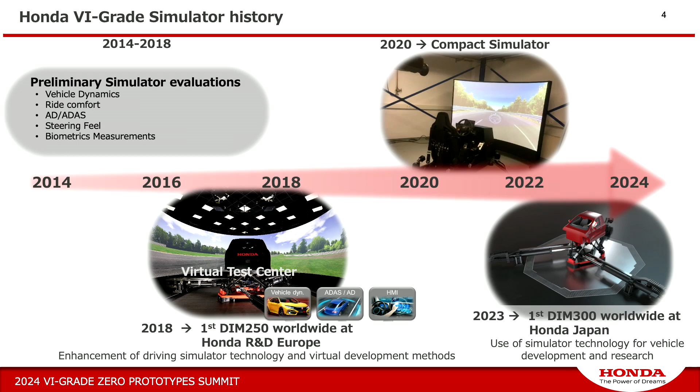Which spec changes can we really feel? We tested several simulator systems. We used them for ride comfort evaluations. ADAS is a big topic, steering feel, and we also gained quite good experience with biometric measurements. Based on all this experience, we decided in 2017 to set up our own virtual test center in our German R&D center, and we established the first DiM250 worldwide. Our role since then is to enhance driving simulator technology and to create new virtual development methods.

After setting up the virtual test center, we thought it's also nice to have a good preparation place because the simulator is very busy. So in 2020, we decided to set up a compact simulator. And based on all the experience we collected in the last years, our Japanese colleagues decided to set up the extended version of the DiM250, which is the first DiM300 worldwide, now used for vehicle development and research topics.

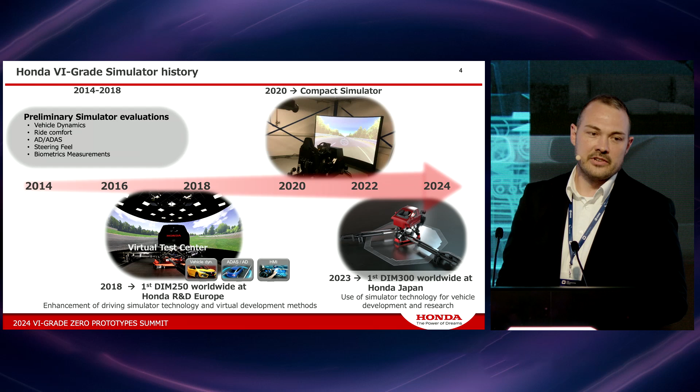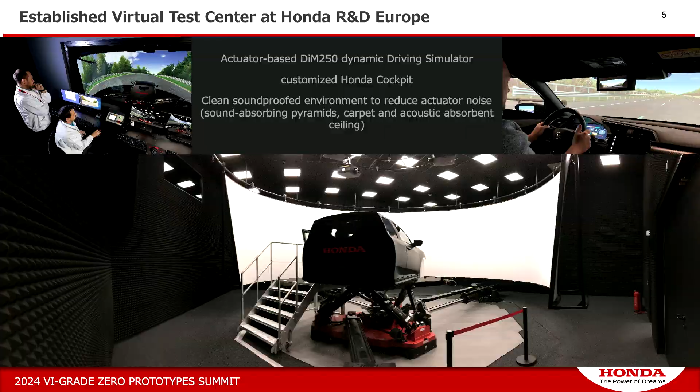On the next slide I would like to show you an overview of our DiM250 virtual test center in Germany. In the center you can see our simulator room, where our actuator-based DiM250 with our customized Honda Civic cockpit is located. It was very important for us to have a very clean environment because we not only do expert tests, we also do a lot of customer studies within our research projects. So it was important to have a clean, soundproofed environment that also reduces actuator noise. Therefore, we installed sound-absorbing pyramids.

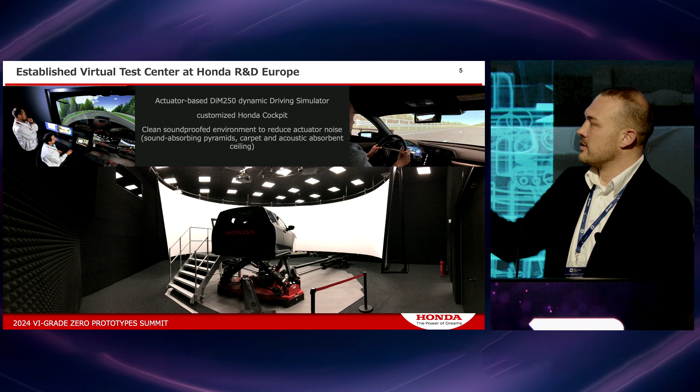We have carpet on the floor and acoustic-absorbent ceiling, so to generate really some kind of an, I would not say living room atmosphere, but it should not look like a test bench. And on the top left, you can see the control room, which is on the first floor, basically, so that we have a very good overview over the whole simulator room. And with this setup, we are quite happy since 2018.

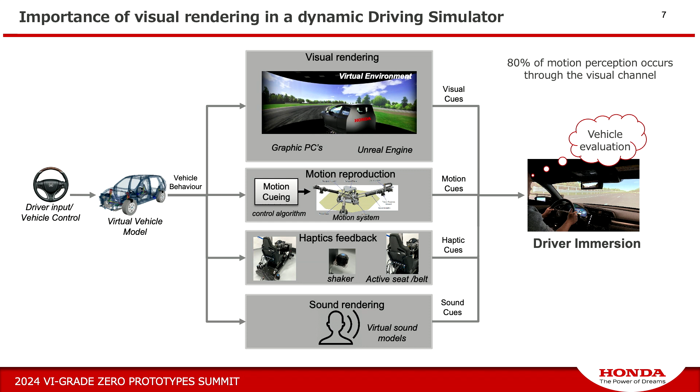Motion is one of the important aspects. To have a very good motion reproduction, we use our motion cueing algorithms, which then control the motion system and generate the motion cues. Haptics feedback, I think most of you already tested here the shaker setups and also could experience the active belt to get some haptics feedback and haptic cues. And also sound is a very important, essential part where we use our sound models, which generate the sound cues, to have basically full driver immersion, which enables us finally to have a very good vehicle evaluation capability.

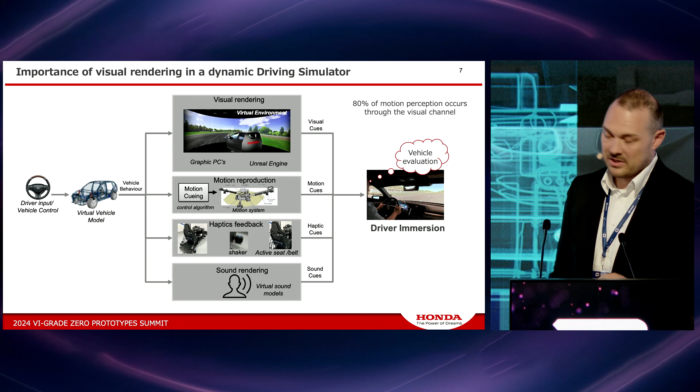And we already know from literature that the visual rendering, the visual flow, influences 80% of our motion perception. So it's a certain important channel which has a high influence on evaluation capabilities. Therefore, on our DiM250, we use 5 Barco projectors, the F70, where we have around 40 pixels per degree with 260-degree field of view, and our graphic PCs have a latency of around 25ms using the RTX 3090.

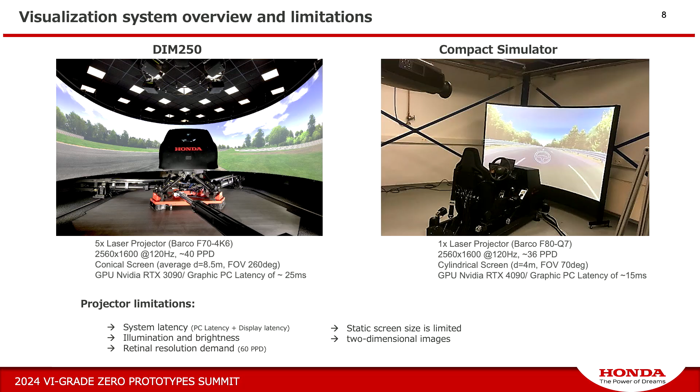On our compact simulator, we use the Barco F80, also here field of view of 70 degree. We use here already the 4090 and could therefore reduce the PC latency, but still we use projection systems which come with certain limitations. In general, system latency is a big issue, PC latency plus display latency, but also projector illumination and brightness. We have our human retina resolution demand, which is in the area of 60 pixels per degree.

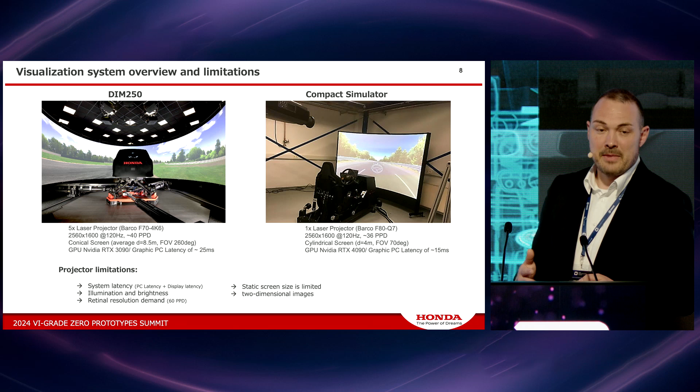Static screens are somehow limited, so when we think about future driving simulator systems, we would like to enlarge the workspace, but still keep the high performance of such a DiM system. We also need to think about new visualization approaches which are suitable for all our applications. And there's a certain missing part in terms of depth perception. We use projection systems with 2D images. So there are also certain aspects missing compared to real-world visualization. And this is what we see here, issues which we noticed in all our last projects.

Basically, speed perception. We did many, many tests, and in general, we can see there's a certain underestimation of speed. On the right side, there are some examples where we tested in different scenarios. The driver did not have any idea how fast they drove because the speedometer was covered. The target speed was to drive 120, and you can see almost all people drove faster based on their perception. It leads basically to 20% faster driving.

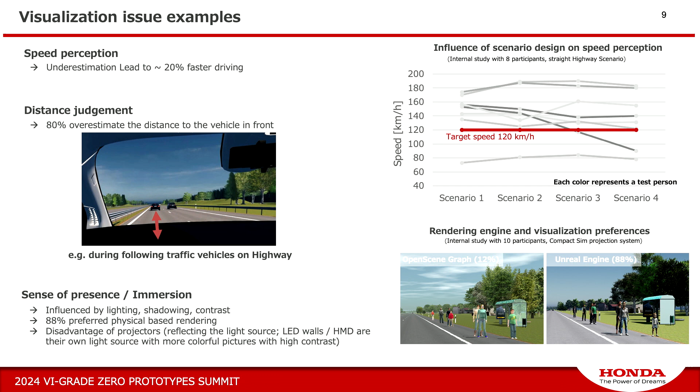Distance judgment is a big topic. We noticed in autonomous driving scenarios, for example, that around 80% do some kind of overestimation of the distance to the vehicle in front. And this leads also to misjudgments during the evaluations. And the last point is also sense of presence and immersion. It's highly influenced by the projection system or visualization system in terms of lighting, shadowing, contrast, because we would like to be as close as possible to the real condition.

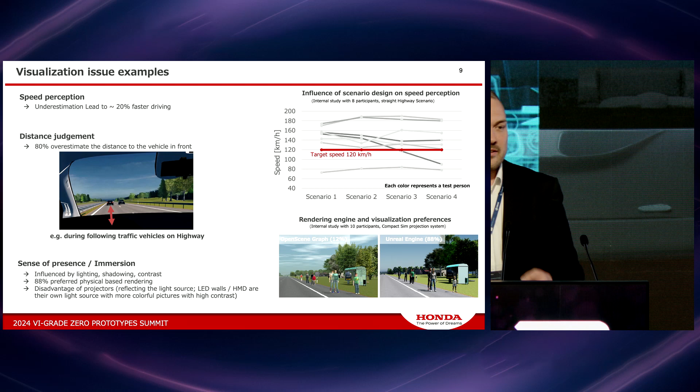And we also did many tests using OpenSceneGraph in a SCANeR environment, but also Unreal Engine. We could see clearly that 88% prefer the physically based rendering which we have in Unreal Engine. And we need to keep in mind that projection systems have certain disadvantages because they reflect the light source. LED walls and head-mounted displays are their own light source, so we can get much more colorful pictures and much more contrast in the visualization. And this is exactly the reason why we started to think about what we can do to further improve the visual immersion.

And in the last years, we could clearly see that head-mounted displays had a quite strong performance improvement, especially in terms of display latency, which got better and better. The resolution and pixels per degree were much more natural, closer to the human eye demand, and also the ergonomics improved a lot. You can see in the table some head-mounted displays where we had a closer look.

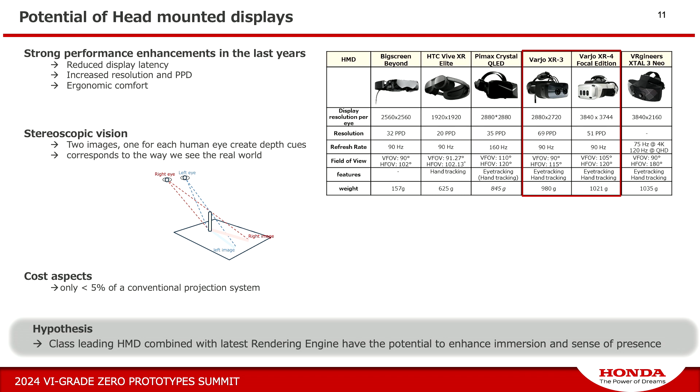And finally, we decided for the professional systems like the XR-3 from Varjo and also the XR-4. We also had a closer look at the XTAL with a much wider horizontal field of view. And luckily VI-Grade also started to implement the XR-3, as well as in future the XR-4, into VI-Realism, which allows us basically an almost uncomplicated implementation in our DiM250 environment.

A big advantage, as I already mentioned, is that with head-mounted displays we now have, instead of 2D, stereoscopic vision, two images, one for each eye, which is much closer to the real impression of the real world. And an important aspect is cost. Such a professional system is less than 5% of a conventional projection system, which has quite a high effect on the investment. So we think that there is a certain potential in using head-mounted displays in future, and this is exactly the point which we currently investigate in several projects.

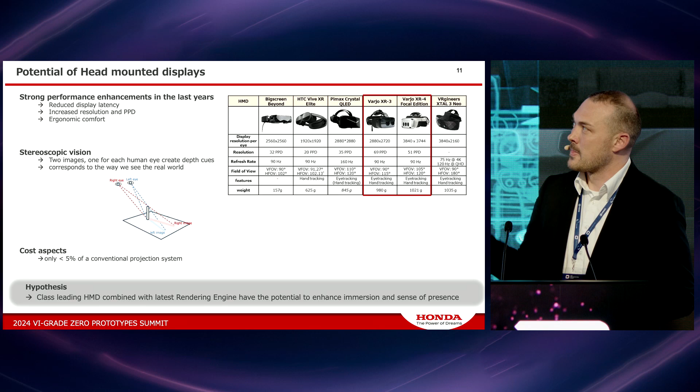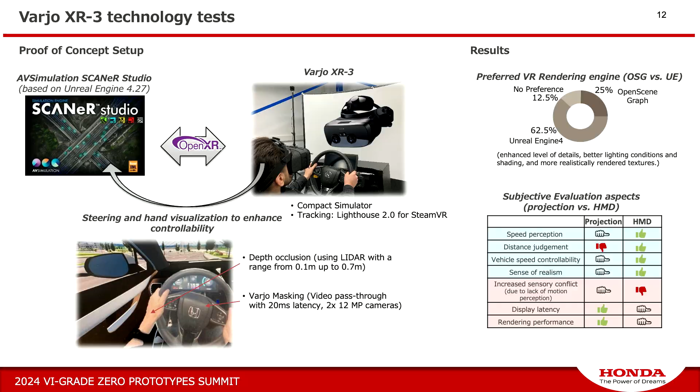We did a proof of concept already 2.5 years ago, where we started with SCANeR Studio. We used the OpenXR interface, connected the Varjo XR-3 to our compact simulator, used the Lighthouse SteamVR tracking, and then did first tests to see the performance of the Varjo systems within these virtual test environments. We also took care of the steering and hand visualization using the Varjo depth occlusion as well as the Varjo masking, and could already see in some studies that the application of VR, even with OpenSceneGraph, provides a quite significant benefit. And here we could also see that 62% prefer the Unreal Engine rendering in VR.

We also did many subjective evaluations with expert drivers, and we could clearly see that speed perception, distance judgment, vehicle speed controllability, as well as the sense of realism could be drastically improved compared to the projection system. But of course, we also noticed some issues, for example, increased sensory conflict. We talk here about the compact simulator. We don't have any movement, but it's a certain aspect which we should keep in mind.

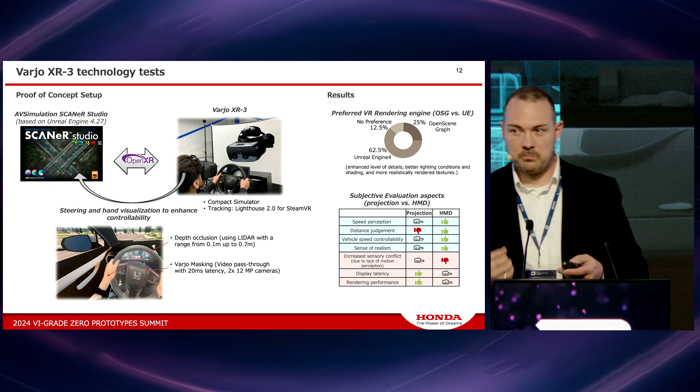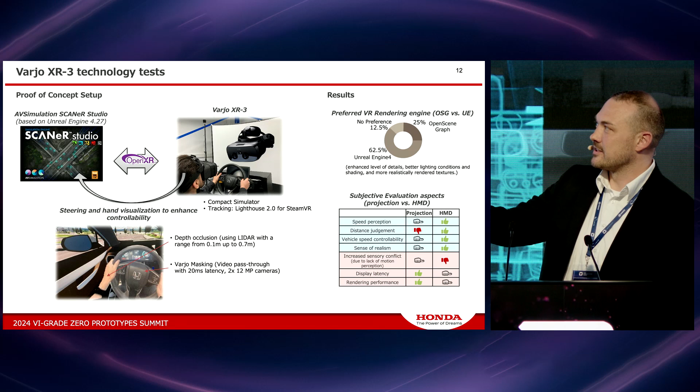Display latency, rendering performance: there's a higher demand when you use VR systems in terms of computer performance and so on. There's still some room for improvement in this area, and we really try to push the industry a little bit in this direction to continue this technology research and improve it step by step. Due to the issues, we decided to continue our tests on our DiM250, especially in terms of the sensory conflict.

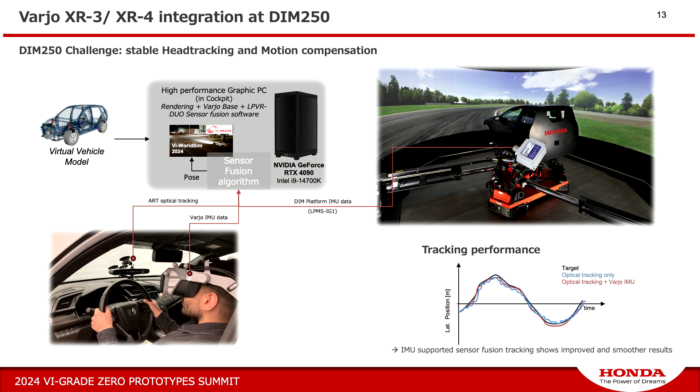So we set up a high-performance graphics PC with the latest graphics card, a 4090, as well as an Intel i9-14700K, and set up this system based on the recommendations by VI-Grade, together with the WorldSim rendering engine. We also use the Varjo Base software on this computer to get the information from our head-mounted display. And then we use the LPVR-DUO sensor fusion software from LP Research, a Japanese company, which takes care of the sensor fusion of an optical tracking system.

You can see here on the windshield, in the bottom left picture, the SmartTrack 3, which is an optical tracking system. We use the Varjo IMU data, and we have to compensate for the platform movements. This is why there is additionally an IMU mounted on the platform itself, and overall the sensor fusion algorithm then calculates a very accurate pose. We were quite surprised about the accurate tracking. In previous setups we got a lot of steps in the movement, so it was not very fluent. With this setup we are now quite confident that this is a very good solution for the future.

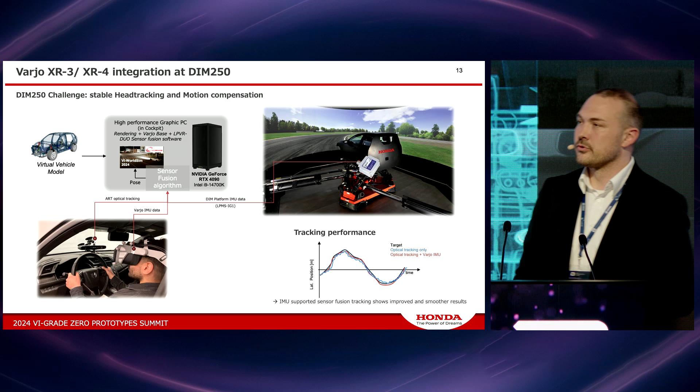We did many experiments so far. Typical evaluation scenarios are straight driving on a 3-lane straight. For speed perception evaluations, for example, here on our big DiM system, we could see that with 260-degree field of view, we still have an underestimation of speed. This was much better with the Varjo XR-3 and XR-4 because we have this depth perception and much more environment information available, which then is much closer to reality.

Distance judgment, also during cornering, for example, is an aspect. Before, with the projection system, it was a little bit difficult to have a very accurate trajectory guidance. With the head-mounted display and the much higher fidelity in the environment, we could significantly improve the trajectory guidance.

Also, when we think about future applications, or maybe exchanging projection systems with head-mounted displays, we need to keep in mind we also have other scenarios like ride comfort tracks. So we also did some initial evaluations on whether we can use a head-mounted display for ride comfort evaluation. And it's some kind of an issue because you have a big mass on your head. So on ride tracks, especially if you have quite big road excitations, quite a lot of heave and bounce movements, you really have to fix it so you don't have too much movement in the visualization. And this quite high fixation creates some discomfort.

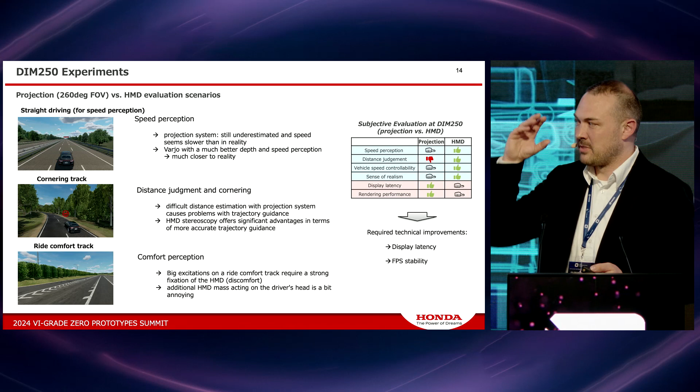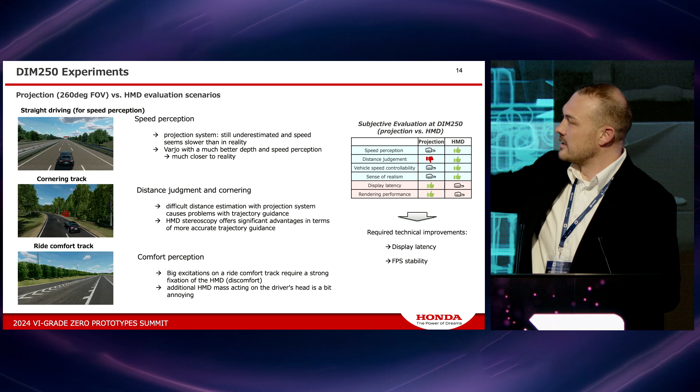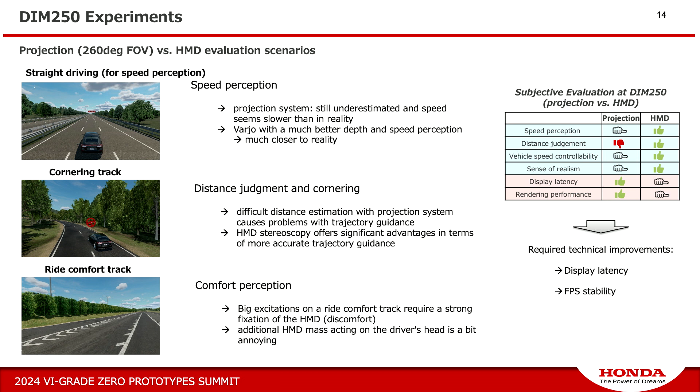We also have to keep in mind it's quite a high additional mass. It's 1 kilogram, which sounds not so much, but it's like driving on a proving ground wearing a helmet; this also influences the subjective evaluation capabilities. But in general, we could confirm our results from the compact simulator, so we can really see the potential. There are still some improvement items, like the display latency, where we are currently in the area of 25 to 30 milliseconds, depending on the content within the scenario. Also the FPS stability, the frames per second on the software side. I think Varjo is working hard on this topic, but there's still room for improvement, and we can clearly see the potential.

Challenges and outlook. Basically, I mentioned already the discomfort during ride evaluations. This is something we probably cannot change a lot just by using the latest head-mounted displays. The industry needs to create high-resolution displays with quite low weight, for example. There's also one issue we noticed in terms of limited field of view. The human demand in the horizontal area is 200 degrees. In the vertical direction, we have around 130 degrees. Head-mounted displays are a little bit limited, especially the Varjo systems, with a horizontal field of view of 115 and 120 degrees. So here there's still some room for improvement.

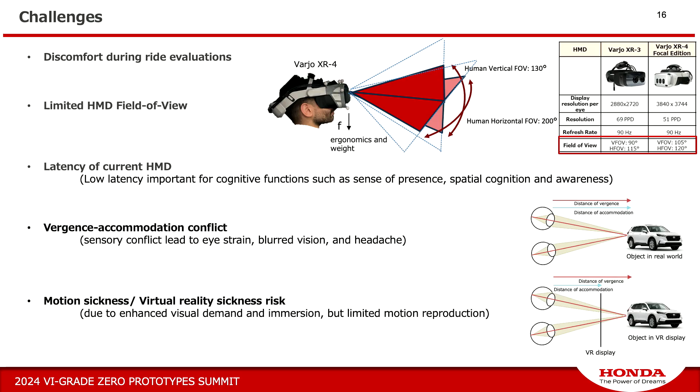Latency of current head-mounted displays, as I already mentioned, is still a little bit high. Lower latency is clearly preferred, especially because it has a high influence on cognitive functionalities, such as sense of presence, spatial cognition, and situation awareness. Also, one issue which we cannot influence is the vergence-accommodation conflict. This really leads, after long driving durations, to eye strain, blurred vision, and headache.

You can see it on the right side: in the real world, when we focus on an object, the distance of vergence, basically how our eyes rotate to look at an object, and the distance of accommodation, basically the focusing, are the same. With VR displays, on the bottom right, we can see that the distance of accommodation, the focusing point to the display, is much closer to the eye, and this mismatch is again a sensory mismatch and leads to some issues during driving.

The last part is motion sickness, virtual reality sickness. We noticed in some tests that many people are quite sensitive to this, and we really have to think about how we deal with this when we plan to exchange projection systems with head-mounted displays, because the visual demand is higher with head-mounted displays. And we also need to keep in mind that with this high immersion, our platform movements are still limited, and we have the sensory conflict between visual and motion.

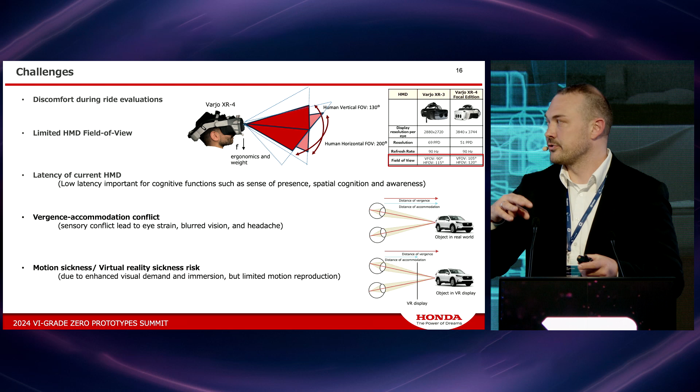So we will continue working on these topics, especially investigating the potential of the XR-3 and now also the XR-4 in more detail with the official release in 2024. We will also have a closer look at virtual reality sickness, especially for longer duration drives, and we will derive future requirements for our next Honda cockpits as well as visualization systems. And this brings me to the end of my presentation.